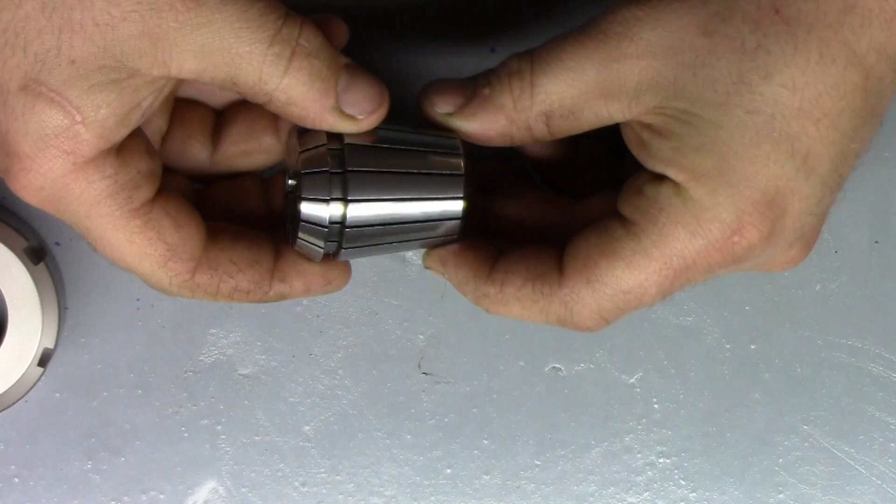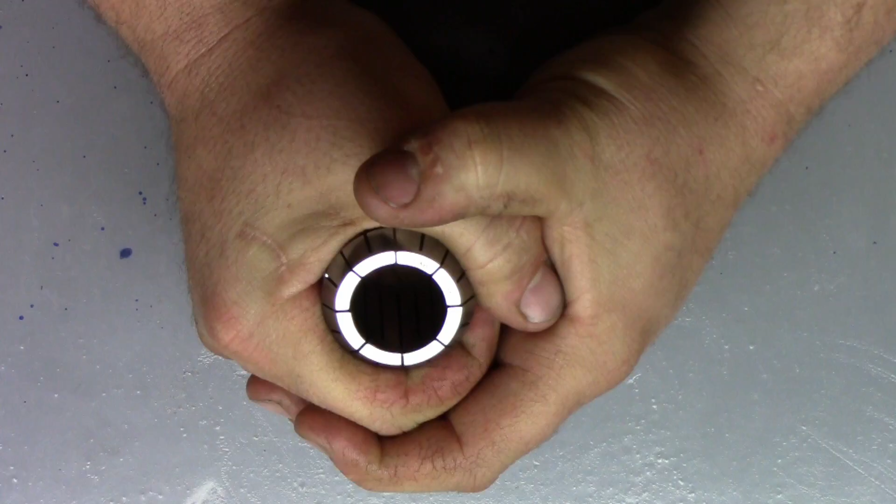Okay, so just to take a closer look at what we got here, that's the collet nut. Here is the collet itself. Let's get a bigger one to make it a little bit more clear. Okay, so here's the main taper, which would sit into the collet chuck. When you tighten down the nut on this face, it's going to draw it in and basically squeeze it together and grab your part.

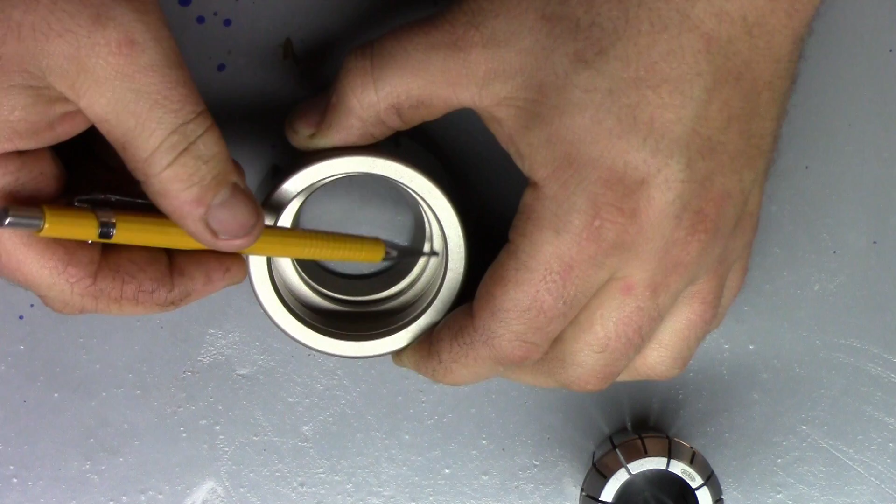Now here's the collet nut, and if you look inside here, you'll see this little feature, kind of like looks like one single thread there. You see that? Now what that does is when you tighten it down, it engages this little lip. And here is the secondary taper I was talking about, that 30-degree angle in here. So when you tighten that down, that engages that lip, and it holds the collet in.

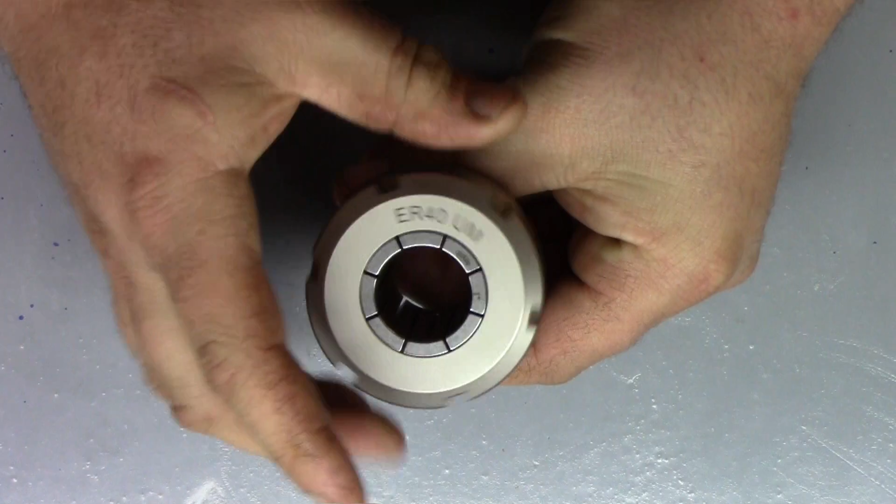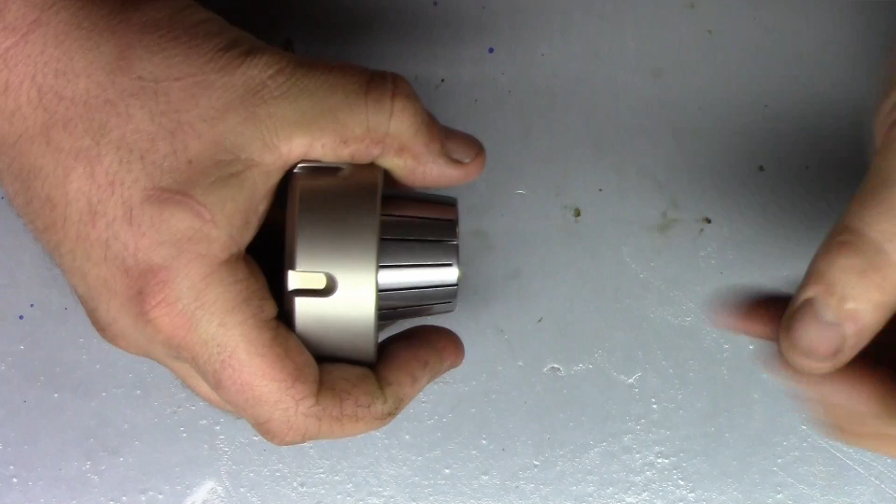So when you tighten it, everything tightens down, it pulls up, and when you unscrew it to pull the collet off, it'll automatically eject itself. So there's no pushing from the back to try to pop the collet out.

There are two types of nuts. There's a standard plain one like this, and there's also a ball bearing one, which has a bearing on the inside. They're more expensive and not much gain for what we're using it for.

Now, you can make these, but you can see you have to do an angle in here, have to do this little ejector piece, and then thread it up to a shoulder. And you have to make sure that you get this angle right and all this other stuff. So you can do it, it's just a little bit more difficult. Rather than do that, we just bought this for 12 bucks. But we just have to contend with that metric thread.

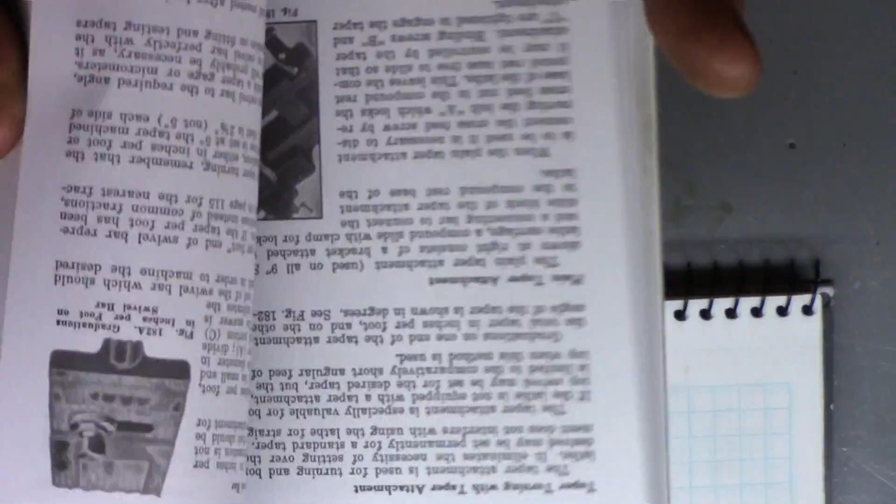Now the way South Bend divides... Okay, so let's take a look at the How to Run the Lathe book real quick, because in here it shows the metric transposing gear. So right here is a 127 to 100 tooth gear.

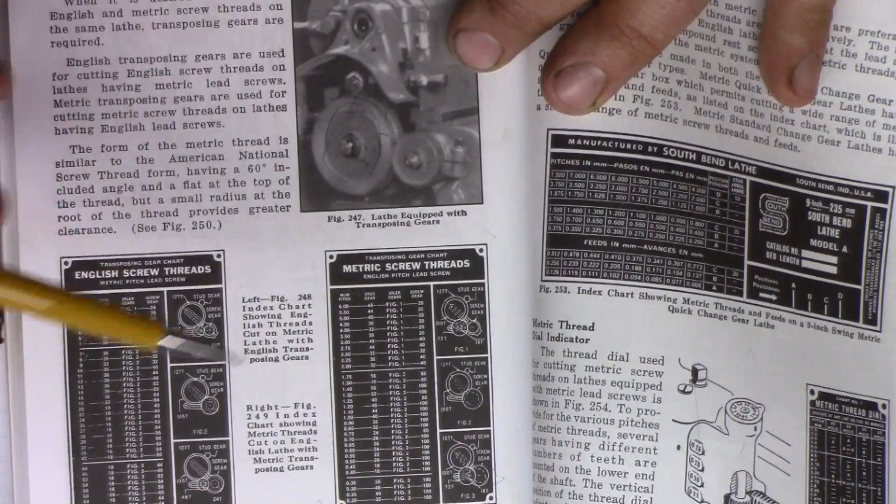That combined with a combination of a stud gear and your tumblers in certain positions, and they gave you an extra chart. For whatever reason, this here is only for a model B or C lathe. The other chart for an A, I believe, would show you the tumbler positions. I know it happens to be 32. You have to have, for 1.5 millimeter thread, you would have to have your tumbler set at 32 threads per inch with a 48 tooth stud gear.

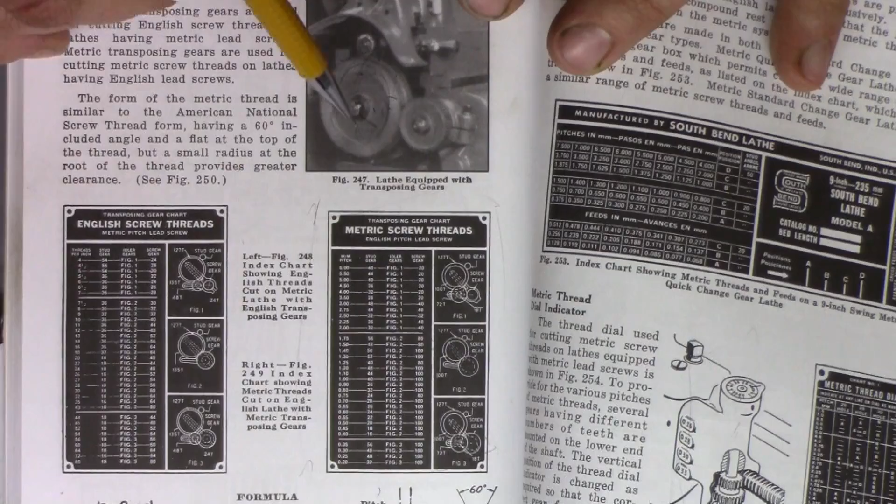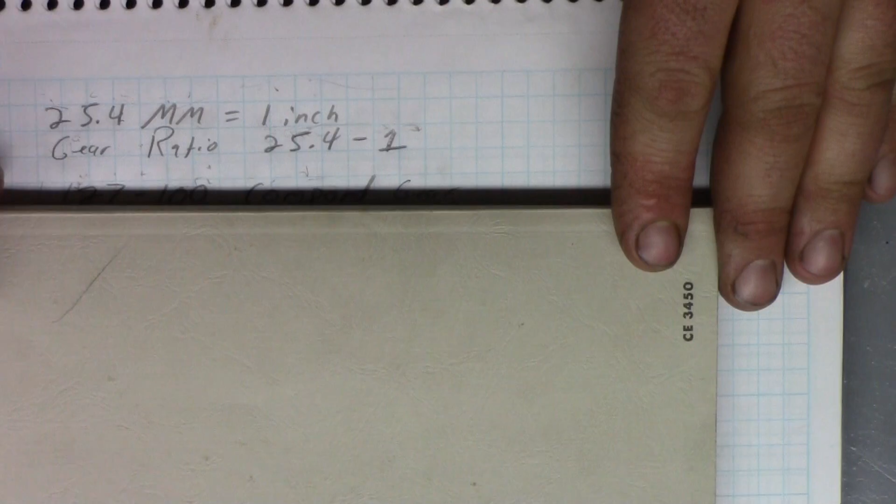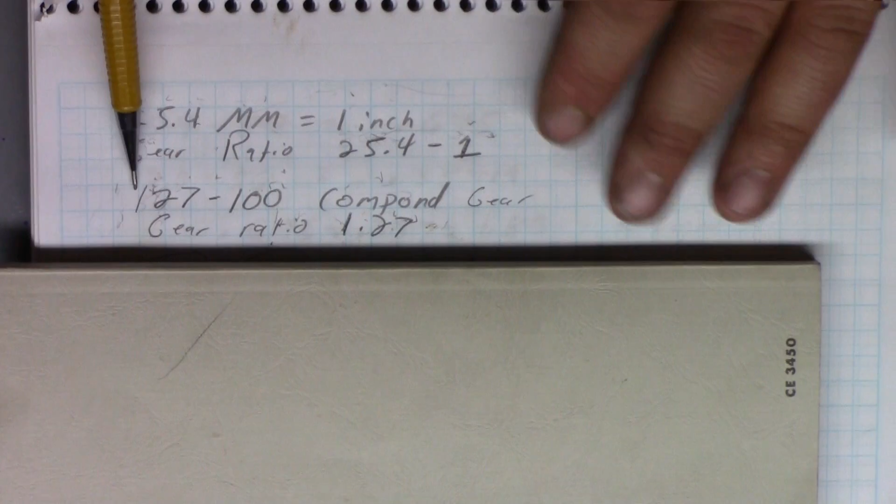Okay, now we can approximate this 127 tooth stud gear relatively easily. So basically, we want a gear ratio, a total gear ratio of 25.4 to 1, because there are 25.4 millimeters in an inch. Okay, so the South Bend transposing set, 127 to 100 tooth compound gear, would give you a gear ratio of 1.27.

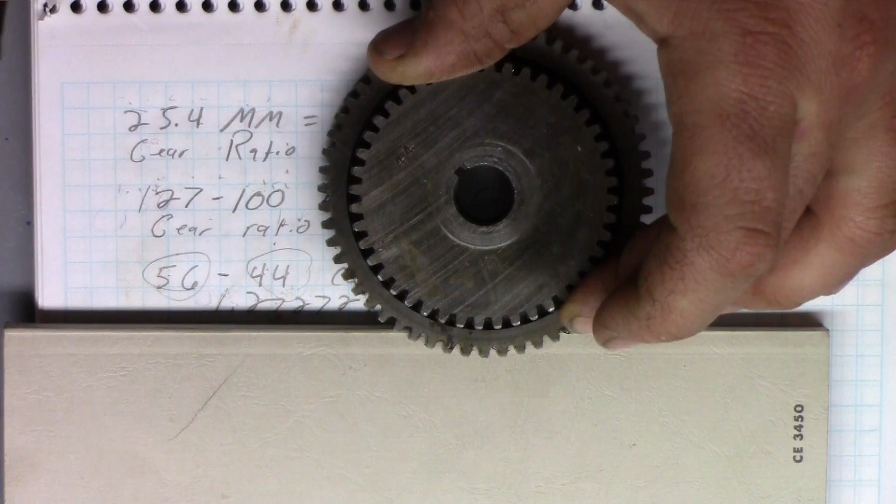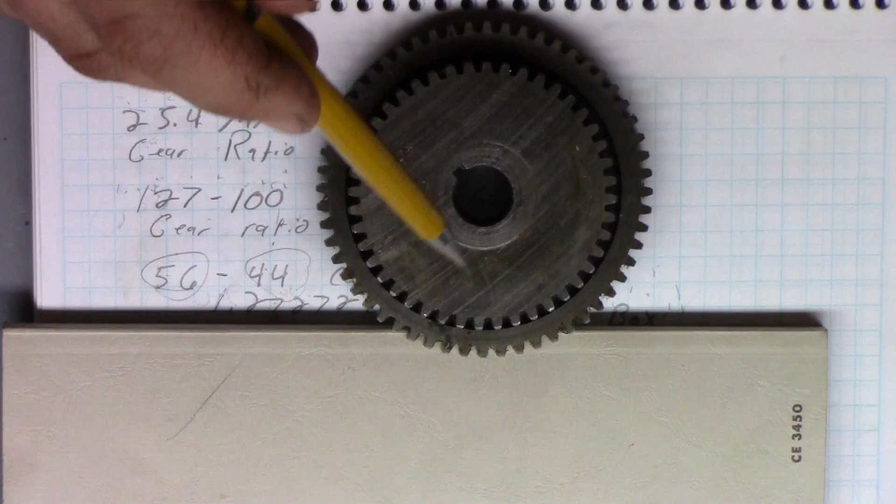Okay, now we can approximate that by taking a 56 tooth gear here and compounding it with a 44 tooth gear. Now we would have to drill holes in this and sandwich them together to basically mate these two pieces together. We would also have to make some new bushings and some new standoffs to get this to sit in the gear train. But these two gears give us a gear ratio of 1.272727. Pretty damn good approximation of the 1.27.

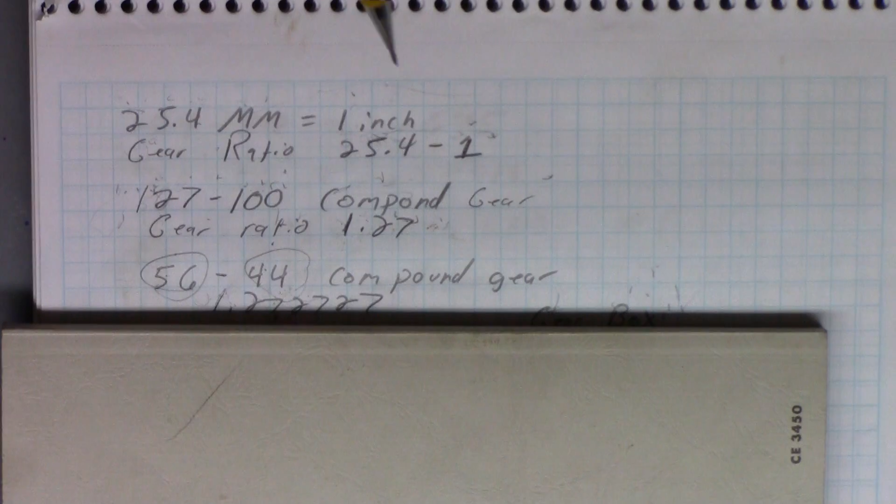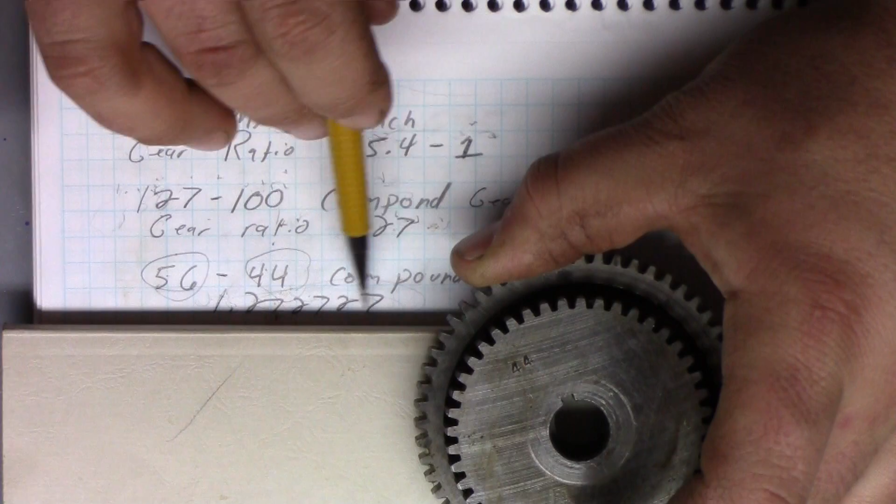Now, this math here only works out for our thread, and I'm pretty sure you can use this for a bunch of other ones, since it's pretty close to the approximation of the 1.27 gear ratio. So you can probably use the South Bend gear chart and these to cut other metric threads. The only thing is I don't know how far the error would compound itself throughout those.

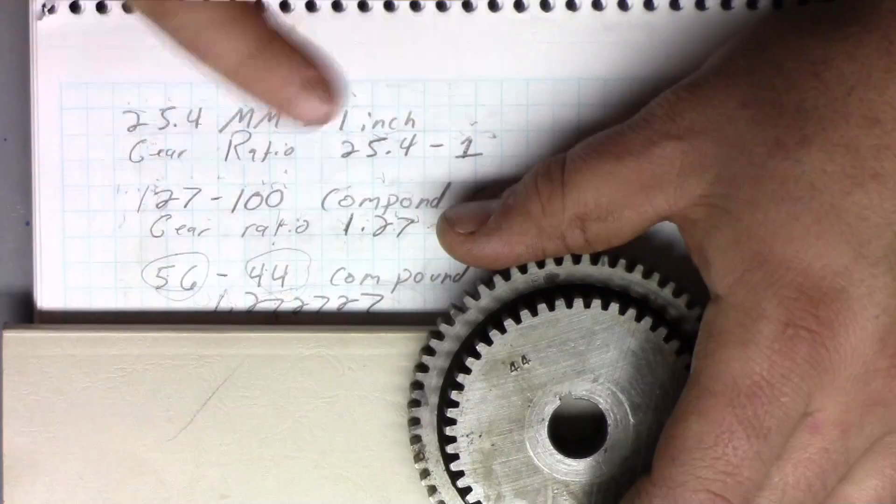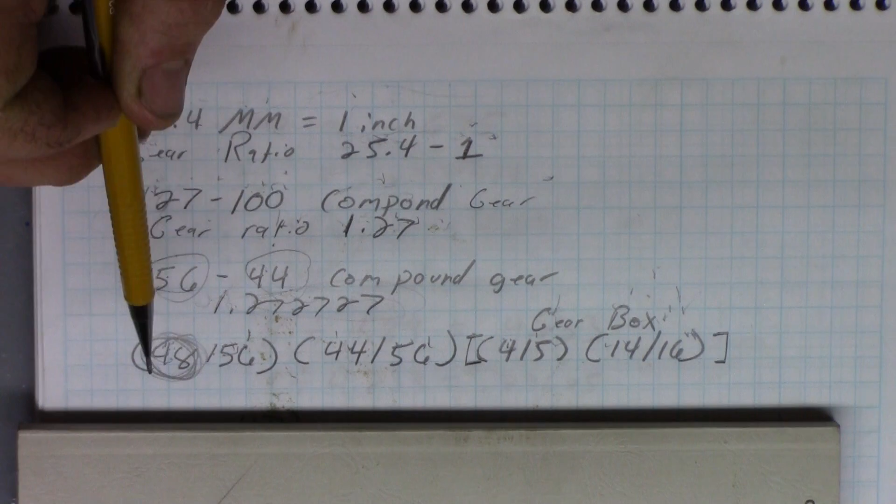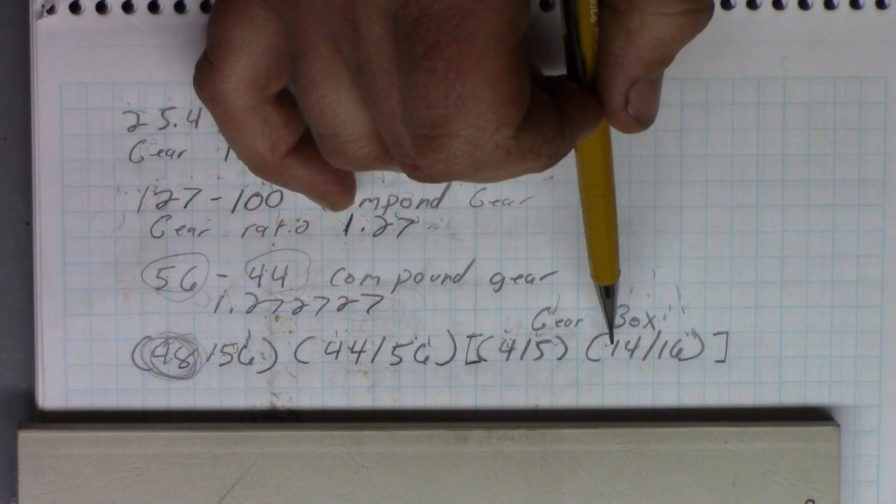So you can work the math on the rest of them, but this math right here is just for the 1.5 millimeter thread. Our gearing setup would be a 48 tooth stud gear to a 56 tooth gear, a 44 tooth gear to the 56 tooth gear, a 4 tooth gear to a 5 tooth gear that's inside the gearbox, and a 14-tooth gear to a 16-tooth gear, also inside the gearbox.

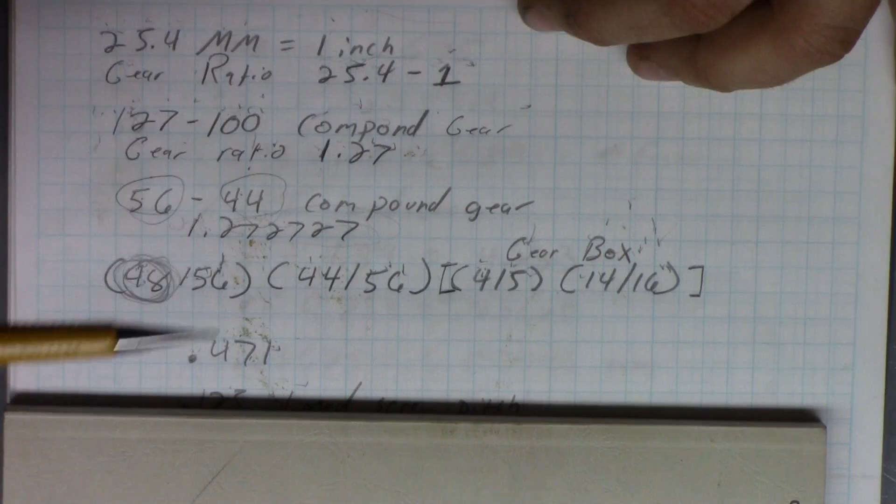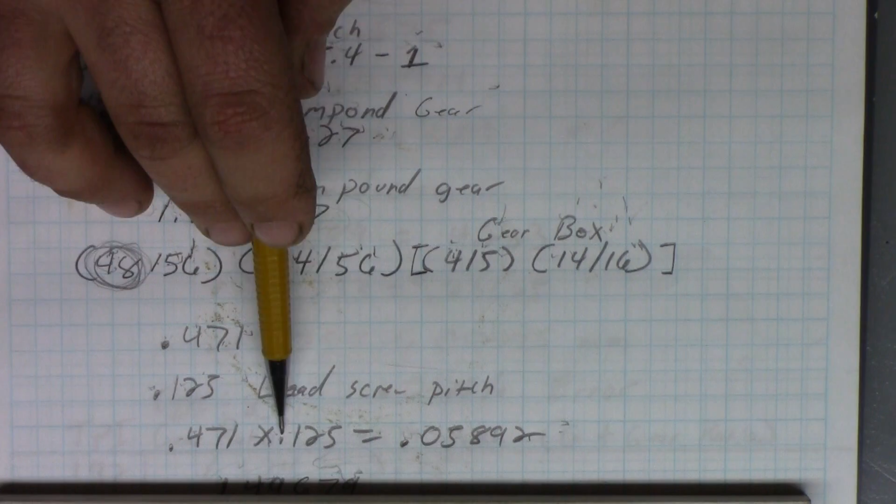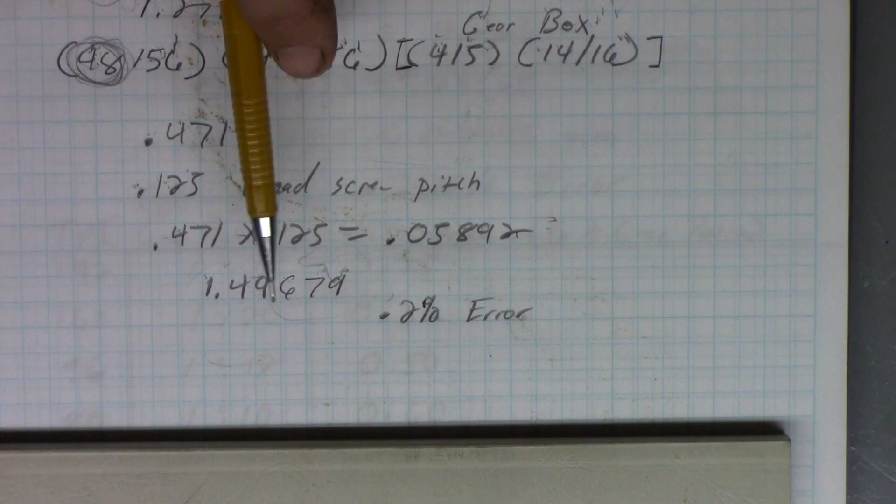If you do all that math out, we end up with 0.471. So for every turn of our workpiece, our carriage is going to move 471 thousandths of travel. Now we have to figure out our pitch. Our lead screw pitch is 0.125. We take our 0.471, multiply it by 0.125, and we come out with 0.05892. When you convert that into metric, it comes out to 1.49679, which is pretty close to 1.5 millimeters. That gives us a 0.2% error.

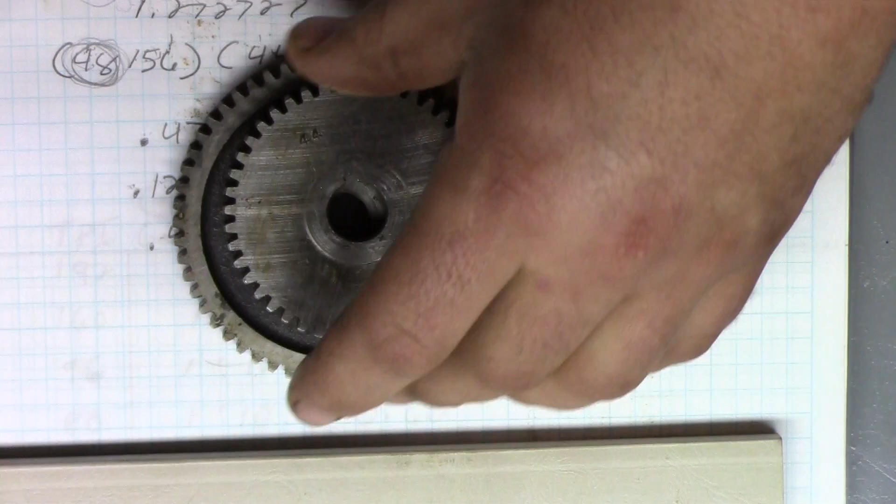So that's one way to do it. The only problem is, as I said, you're going to have to do some machining to the gears and some bushings and everything else. But there is an easier way to do this.

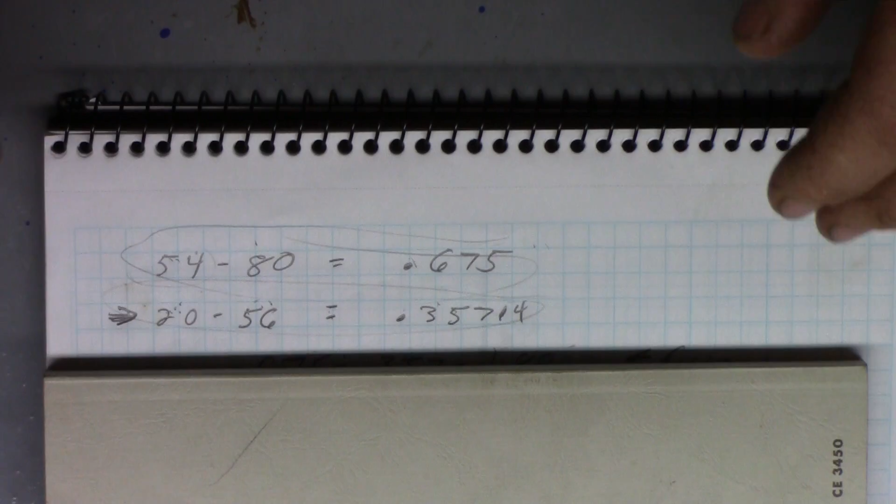So what does that mean to us? Well, that means our lead screw is going to be spinning faster. How much faster? Easy way to figure that out: we take the 0.675 we're now spinning, divide that by 0.357, and that equals 1.89. So we're moving our lead screw 1.89 times faster in this configuration than in the other one.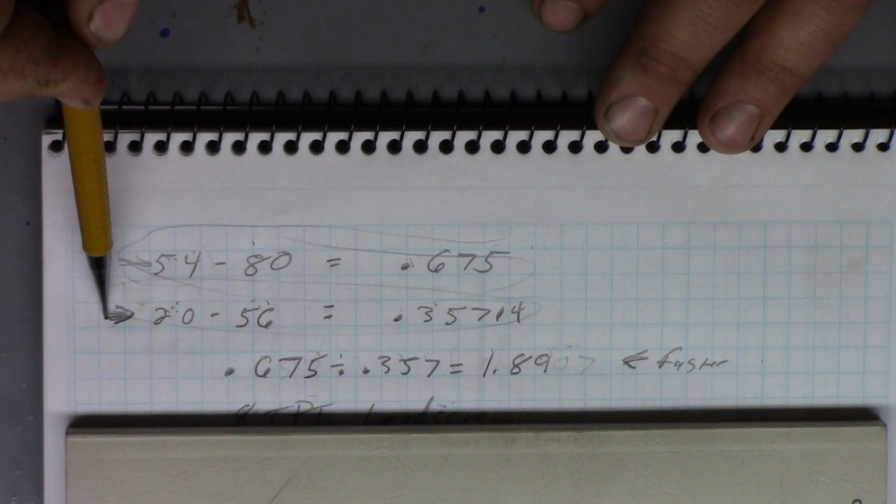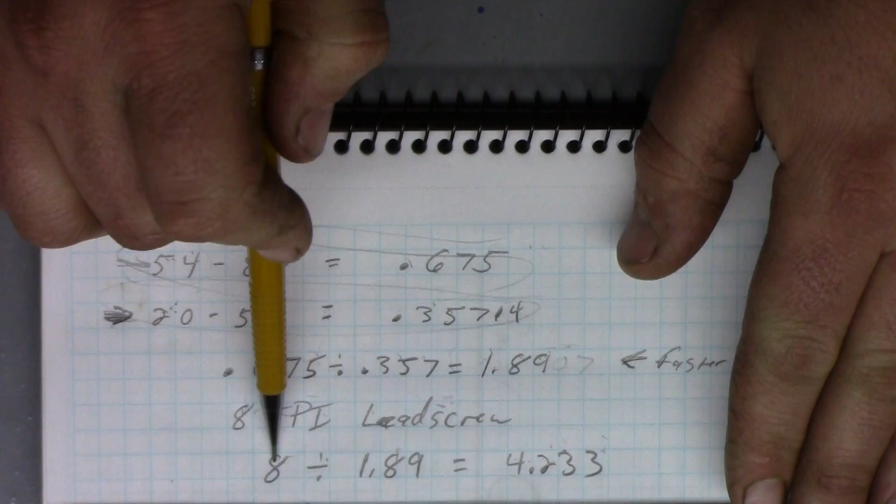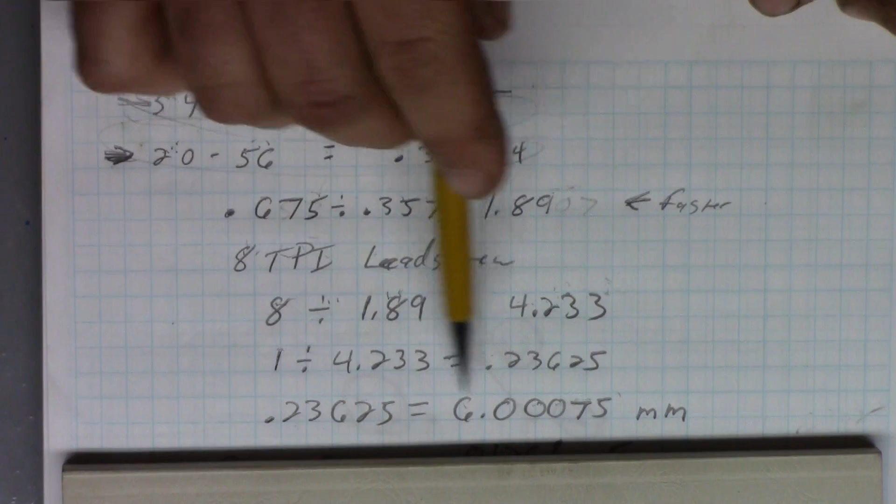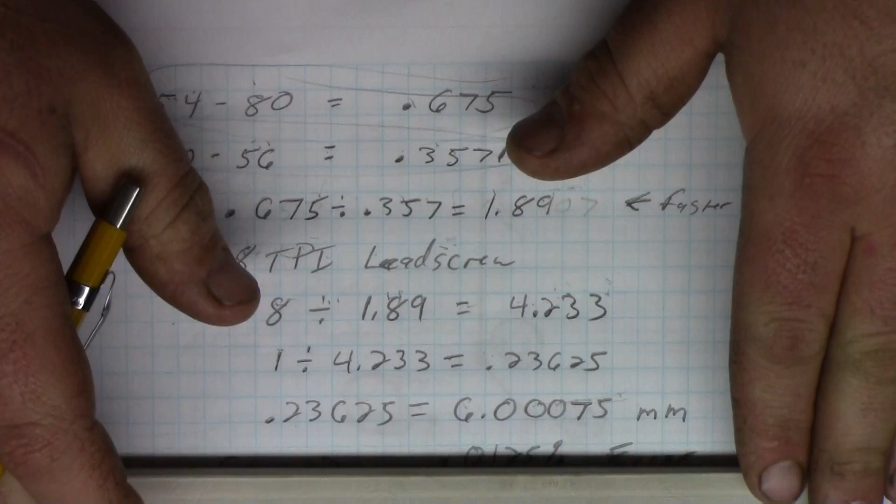So what does that mean for us? We have an 8 TPI lead screw. If we take that 8 TPI divided by our faster rotational speed, that equals 4.233. We divide that into 1 to get the pitch, which equals 0.23625. That equals 6.00075 — I simplified some numbers, but if you do this all by calculator, that's what you come out with. When you change it over to millimeters, you end up with pretty much 6 millimeters, about a 0.0125% error. So our lead screw, in this configuration, basically turns into a 6 millimeter lead screw.

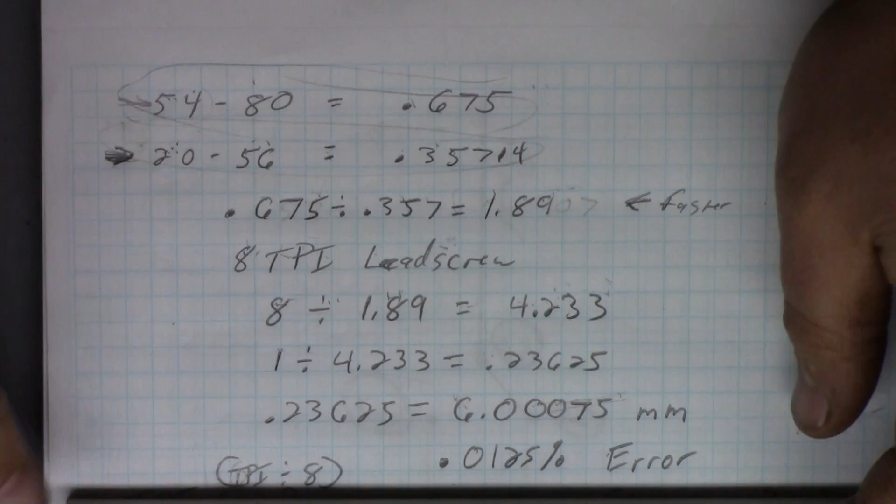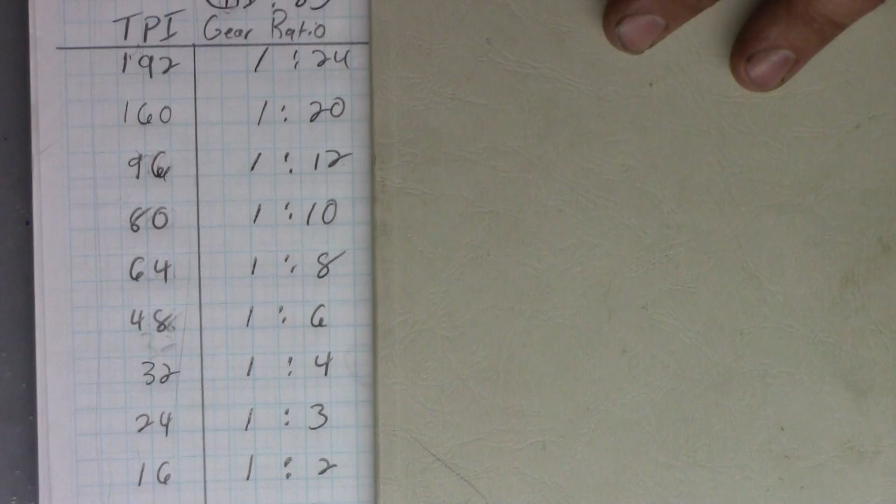So now here's the cool thing. We can take that 6 millimeters, and over here these numbers are the threads per inch stamped on our gearbox plate. We want to figure out what gear ratio gets us these threads per inch. To do that, we use the original 8 threads per inch of our lead screw: the gear ratio equals the threads per inch divided by 8, since your lead screw is 8 threads per inch. So these are basically all your gear ratios for each of these individual settings on the gearbox.

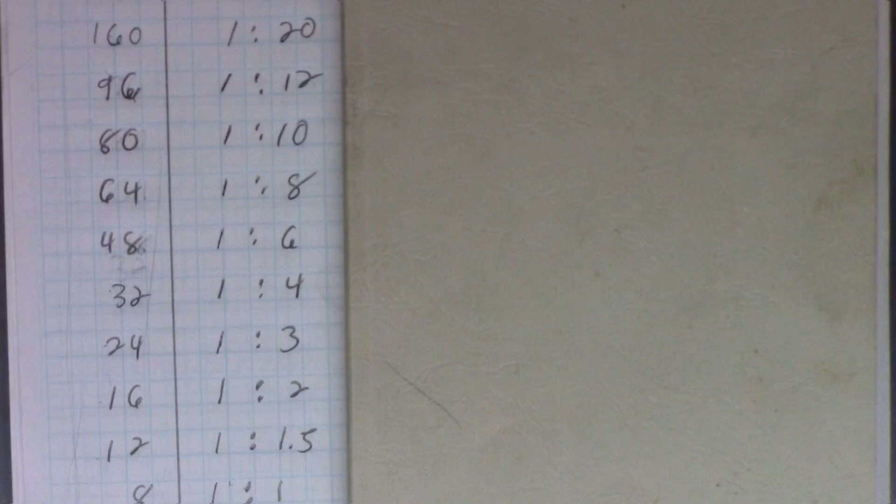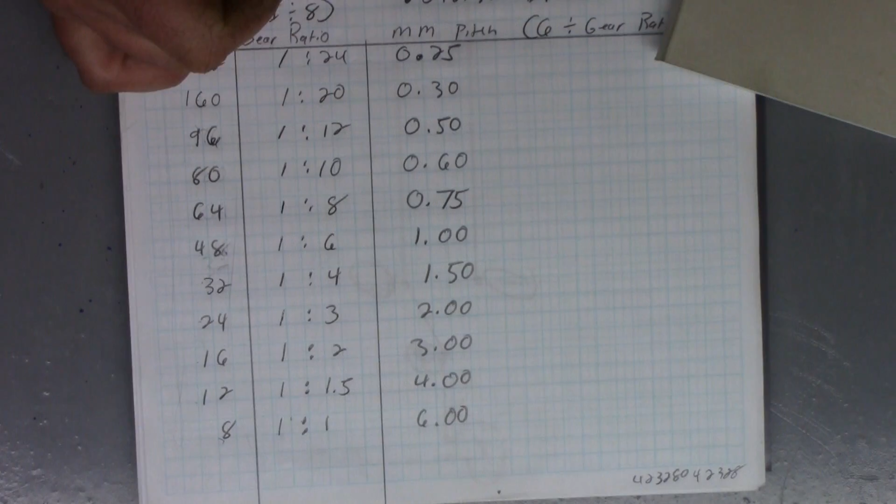Now these — what is this, 1, 2, 3, 4, 5, 6, 7, 8, 9, 10, 11 — these 11 gearbox settings, let me zoom you out a hair so you can see them all together. When you divide that 6 millimeter lead screw by this gear ratio, guess what? You can cut a whole bunch of metric threads here.

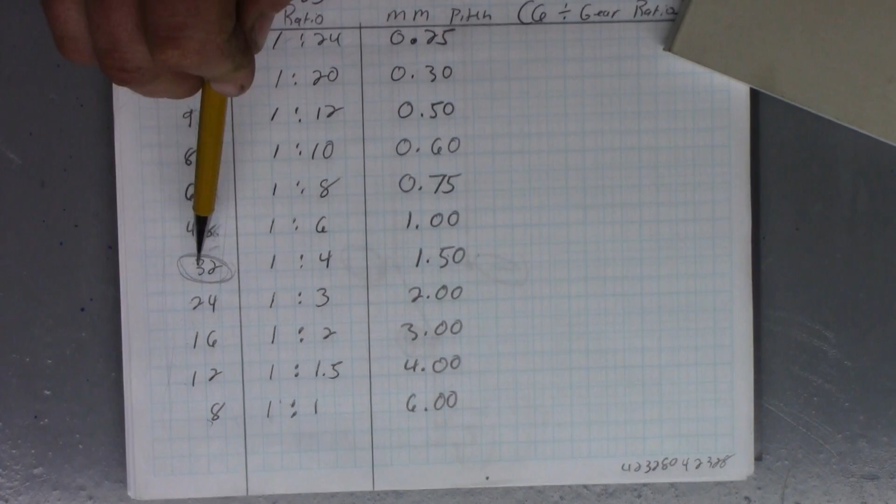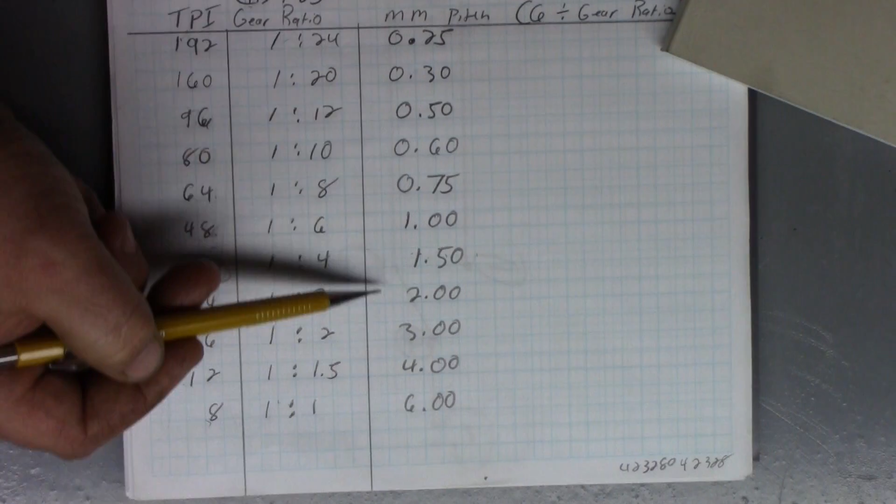So if you look here, here's a bunch of common ones all set up to cut millimeter threads. We want a 1.5 millimeter thread, so we'd have to have our tumbler set to 32 threads per inch. We can cut a 1.5 millimeter thread by changing out our stud gear to a 54-tooth gear, our screw gearbox input gear to an 80-tooth gear, and setting our gearbox to 32 TPI — we can cut a pretty good approximation of a 1.5 thread. Now you can see these are all the other threads that would equal out to a millimeter thread, and this is what we can cut using just those two gears.

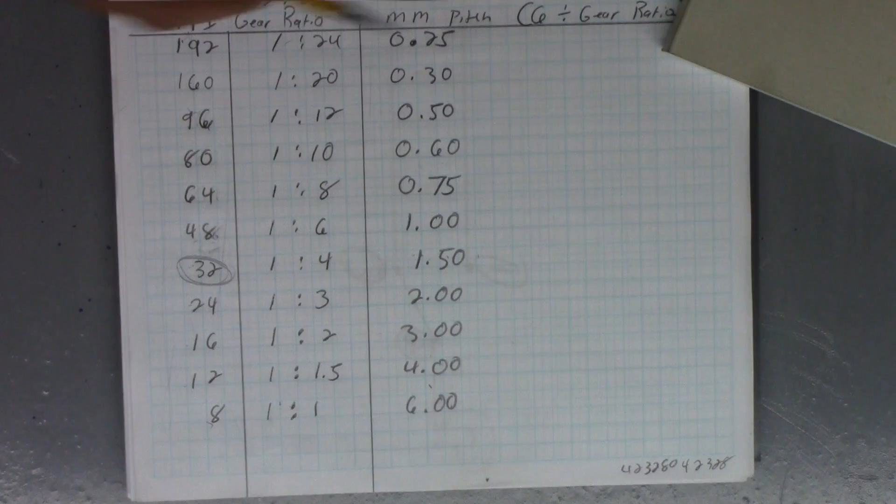Just these two gears here — I'm sorry, not those two, these two gears here — we can cut these, what did I say, 11? 1, 2, 3, 4, 5, 6, 7, 8, 9, 10, 11. We can cut those 11 standard millimeter threads. Okay, so what we're going to do right now is set up on the lathe, get this gearing in place, and see if we can cut this.

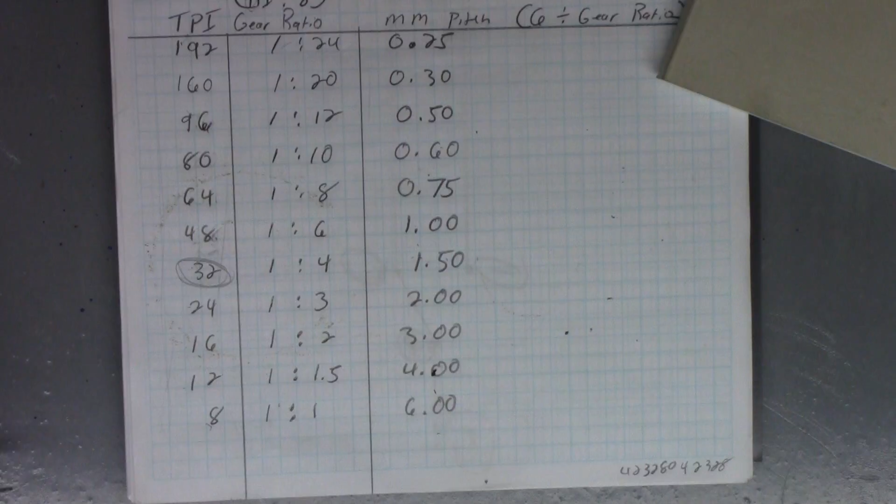Okay, so here's our standard gearing arrangement, and what we're going to be doing right now is changing it. So we need to put our 80 tooth gear down here.

And these are all black and oily because I use Kling brand wire rope and gear oil on these just to quiet them down a little bit. So we're going to take that one out, and we're going to take this one out.

Okay, and we're also going to have to loosen this up. Alright, so we want our 54 tooth gear here. We want that on the stud as a stud gear. And we want our 80 tooth down here, and we're going to put that back on there as the spacer.

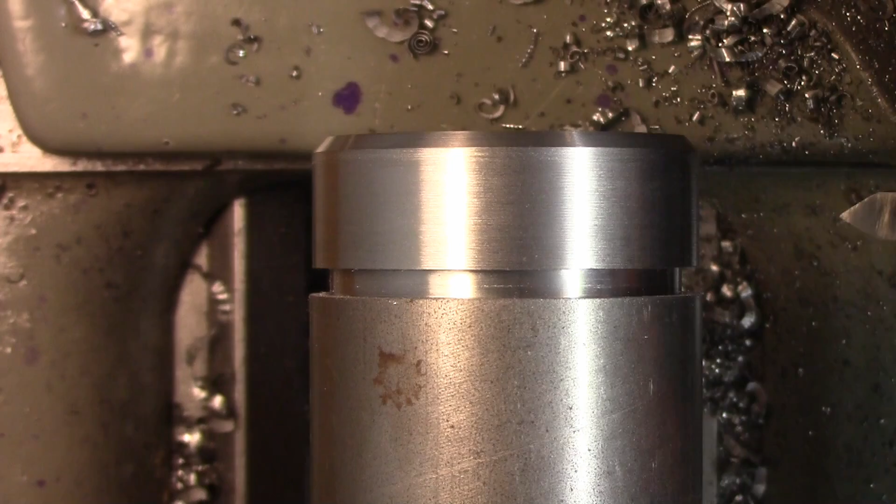Okay, so we have everything set up, and it's a regular 60-degree threading tool, just like any other threading, but the only problem I'm going to have is I cannot disengage the half nuts. So I'm going to try to just reverse the motor. I have an instant reverse motor, so I'm going to see how that works. If that doesn't work, then what I can do is leave the half nuts engaged, but disengage the tool, and then re-engage it on the way back. I don't know, we'll figure it out.

So for right now, what I'm going to do is we'll just get everything comfortable like normal threading. Turn this on, and use the compound here. I'm going to just touch. So I'm going to set zero on everything.

And what I'm going to do without touching anything, we are going to engage the half nuts, and we're going to see how fast this moves.

Right, so that's not too bad. I can work with that. All right, so let me see here.

If I can kind of measure pitch roughly. That's not deep enough. All right, so this will be our scratch pass here. Let me just reverse that out a little bit so we can get some bluing. Okay, we got some bluing on there now, so we're going to take a little bit of depth of cut and we're going to see what happens.

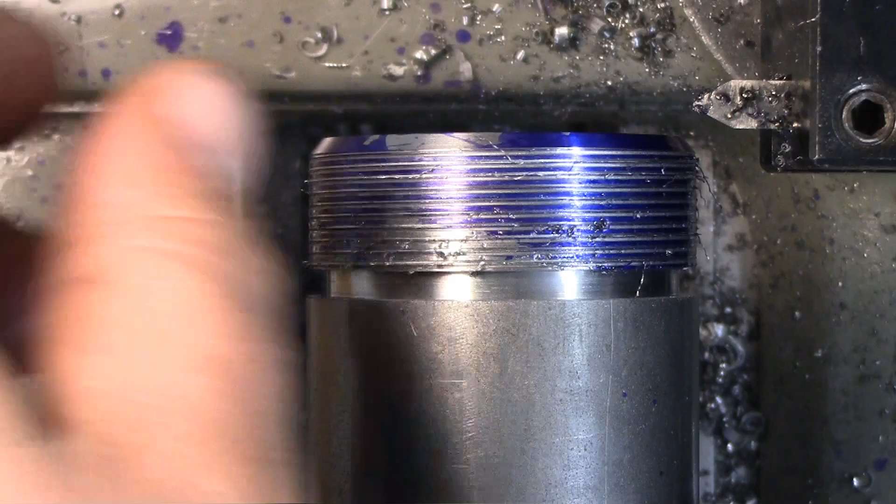All right, because of... yeah, we got the 1.5 pitch though, but because of... yeah, that's definitely one groove there, I got 1.5. All right, so we're going to have to pull out and then before we back up. So it's going to be a little bit tricky, but we'll take another little bit of a cut.

All right, that seems to work. That seems to work pretty good. I'll go for that.

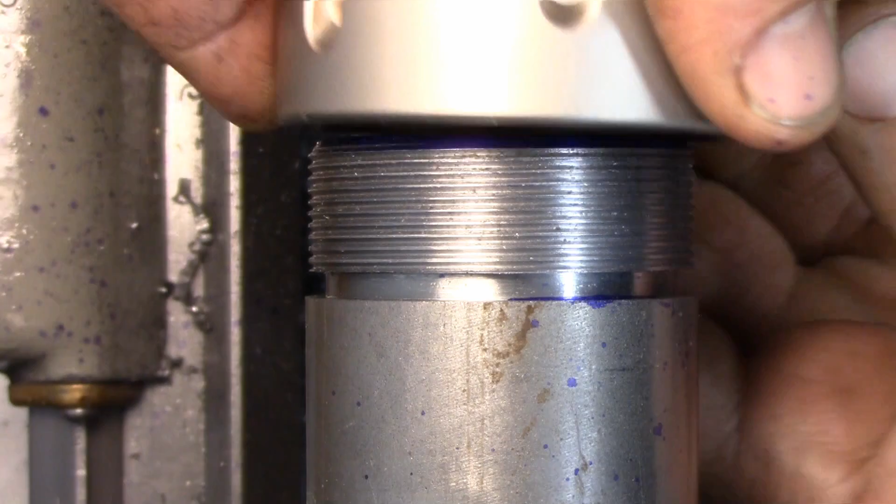Alright, let's try the nut. Well, it starts. So it's got a little bit more to go then.

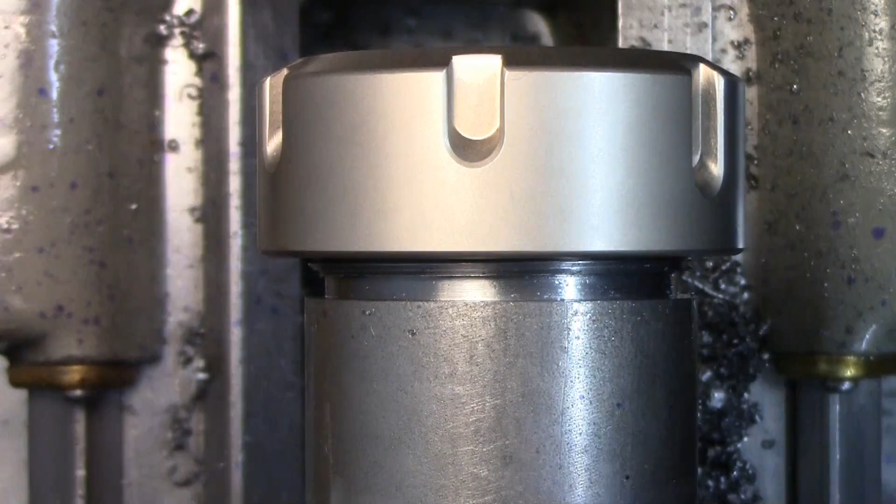Well, there she is. Look at that. Alright, so we can cut metric threads. Ha ha ha! Beautiful. So now we know everything works.

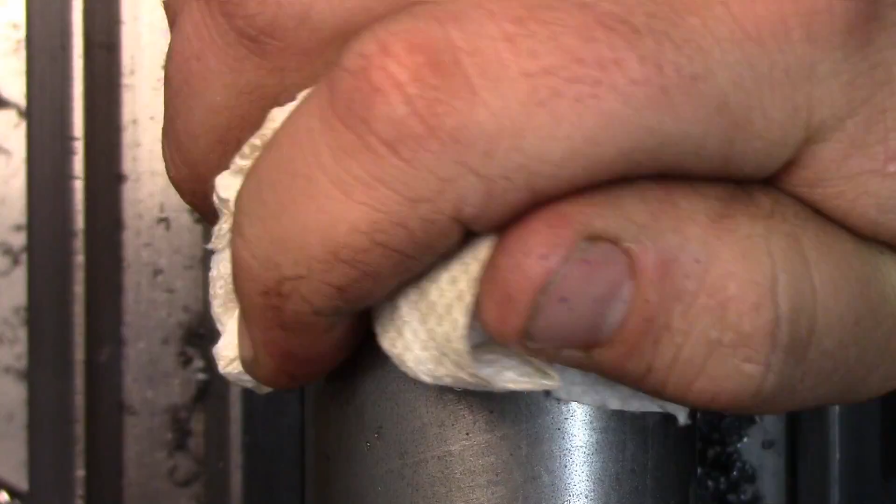Just give it a little cleaning. And on the back side here. I really should blow that off. I just don't want to start up my air compressor, but...

No wiggle. Look at that. Alright, so metric threading on an Imperial lathe, it works. So once that stock comes in, we'll start working on the body of the chuck and get this project up and going. Thanks for watching.